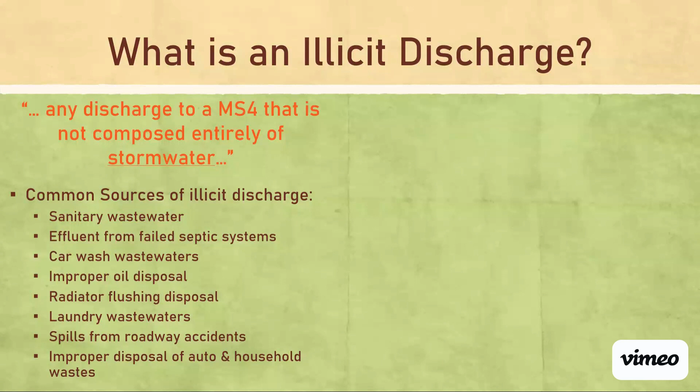And here's a list of other stuff that unfortunately sometimes gets into storm sewer systems, and that's what we want to prevent. So we got a list of sanitary wastewater, effluent from failed septic systems, car wash wastewater, improper oil disposal, radiator flushing disposal, laundry wastewaters, spills from roadway accidents, and improper disposal of auto and household waste. So those are the things we want to keep out. And here are some photos of some of those bad boys that, again, should not be in your storm sewer system.

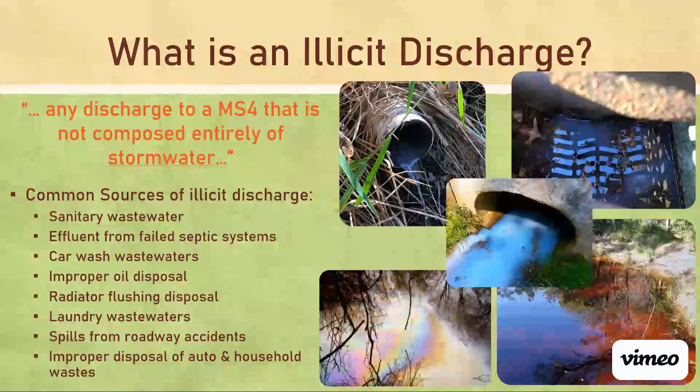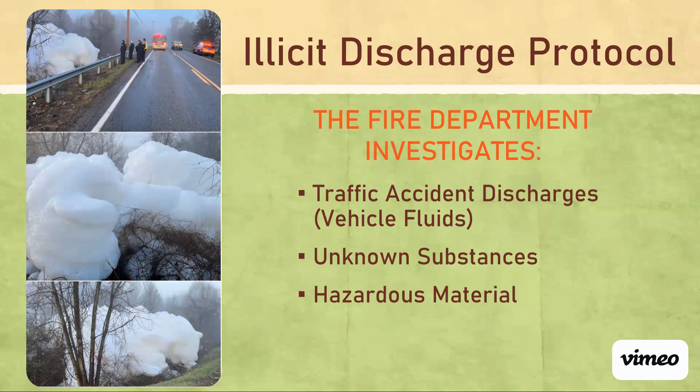So if you do get a call from a resident reporting an illicit discharge, who in the heck should you seek help from? Well, it depends on the type of discharge. It could be the fire department or the health department or us. So let's start with the fire department. If it is a traffic accident discharge, basically fuel or fluids from vehicles, an unknown substance or hazardous material, you're going to want to call the fire department. They're trained to handle those kinds of substances.

If it is fats, oils, grease, restaurants, dumpsters, or gray water, non-toilet water, septic sewage, solid waste, or open dumping, you want to contact your health department. If you're a community that has one of these health departments listed, you would call them. And if you don't have one, that means you call the county health department. So any of these things would be covered by the health department.

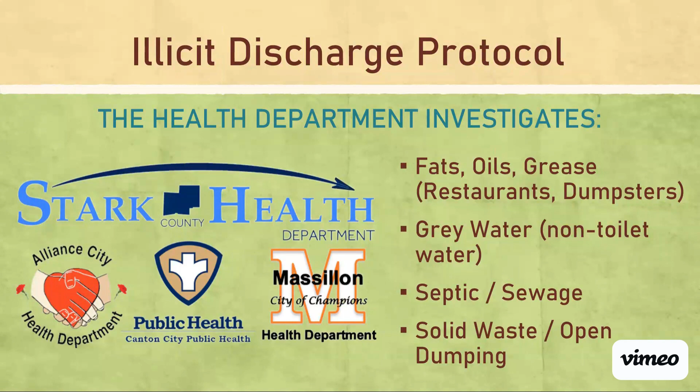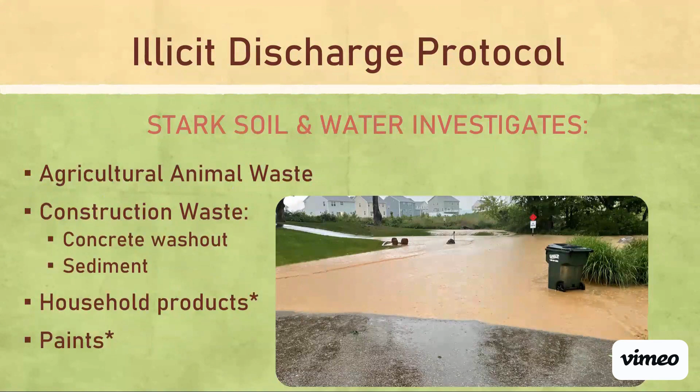And there are times when you would call us to do that initial investigation. So we handle agricultural animal waste, which is basically manure and wastewater, construction waste, concrete washout, sediment. Here's some examples of sediment that came off an idle site that got into the community storm sewer system. And all material that gets into your storm sewer system does eventually end up in waterways.

And there's a picture of it being dumped into a waterway, and that's what we want to prevent. Ohio EPA defines sediment into waterways as a pollutant. And then household products and paints, if you're with the city of Canton, they would handle that through their health department. We would conduct the initial investigation for those.

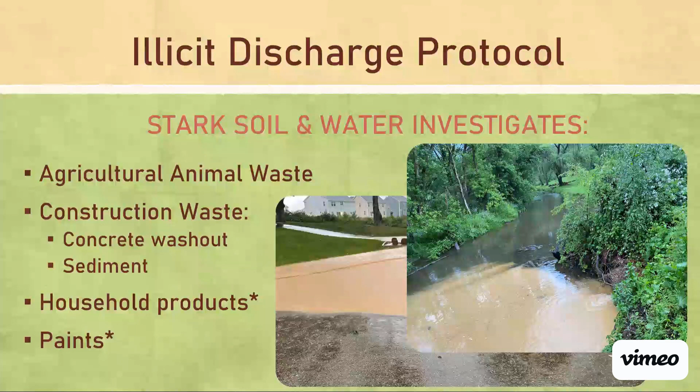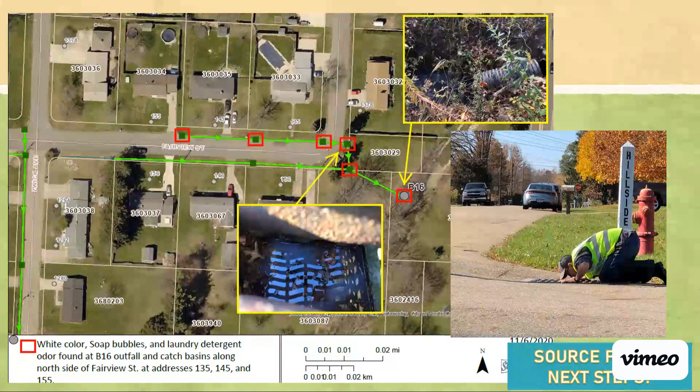So if you call us and say, hey, we may have an issue, can you check it out? What in the heck do we do for you? Well, we go out and do an investigation, and here is myself peering into a catch basin, trying to determine where some of that bad stuff is going. We'll create maps that indicate where we found the illicit discharge and also a possible source of where that illicit discharge is coming from. So we will turn that information over to you, and then after that, it's up to the community to follow through.

So you've got locate problem area, which most times we can do for you. Sometimes we can determine the suspected source of that illicit discharge. And after that point, you need to follow up with that resident. So you're going to need to knock on some doors and determine what may be causing that illicit discharge. So again, the important thing is once we give you the information, it doesn't stop. You need to take that next step to determine and have that source of illicit discharge removed and correct any illicit connections. So you're going to have to talk with some property owners.

And always you're going to want to document what you do because Ohio EPA audits all MS4 communities. In Stark County, they do 1 to 2 communities a year. There are 18 MS4 communities in the county, so you can do the math, but eventually they'll come around to you. So you want to have your ducks in a row and show that you responded to the illicit discharge and it got corrected.

There are a few cases where you need to notify EPA immediately, and there are 2 cases. One is if you discover illicit sanitary cross connections from industrial, commercial, or multi-family sources, not single family, basically duplexes or apartment complexes. The other is a leaking or broken sanitary sewer line that is actively contributing sewage to the MS4 community. In those two cases, Ohio EPA, under the permit, wants you to contact them immediately.

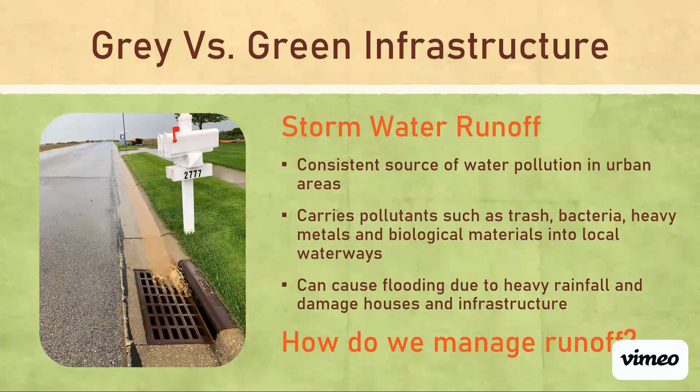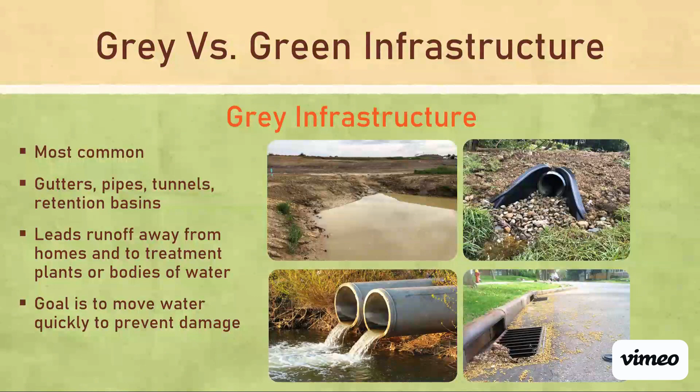Additionally, the capacity of gray infrastructure to manage large amounts of runoff is decreasing. And this kind of ties back into my first point that I made. As it's aging, a lot of these pipes are cracking, the water's leaking out. They're also getting clogged with sediment and trash. So over time, they're just not able to handle large amounts of runoff anymore.

Gray infrastructure can also be very costly to construct and maintain. As you know, a lot of these structures are really big. They're made out of heavy materials such as concrete or clay. They can also be deep in the ground, so it takes a lot of labor, a lot of money, and heavy equipment to not only install these things, but also to maintain and fix them.

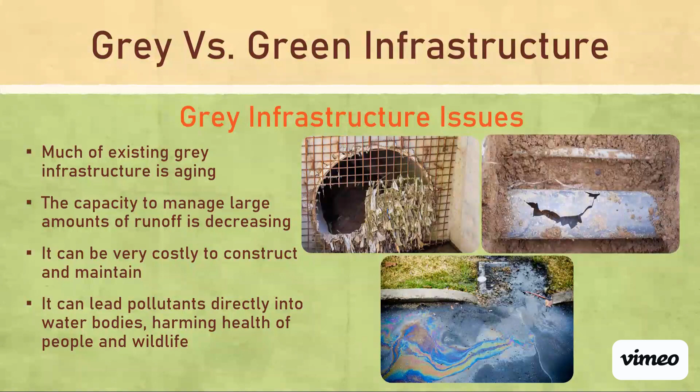And lastly, gray infrastructure can lead pollutants directly into water bodies. So if that water is not going to the water treatment plant, then oftentimes it's getting let out directly into the environment. And as we know, those pollutants are going to run off into things such as our ponds, our streams, and our lakes. And this can harm the health of not only ourselves, but also our local wildlife.

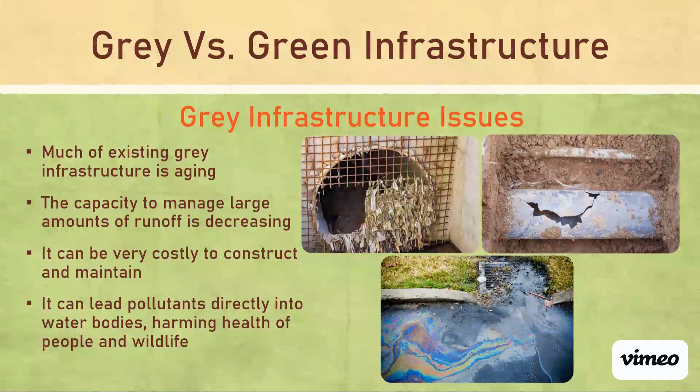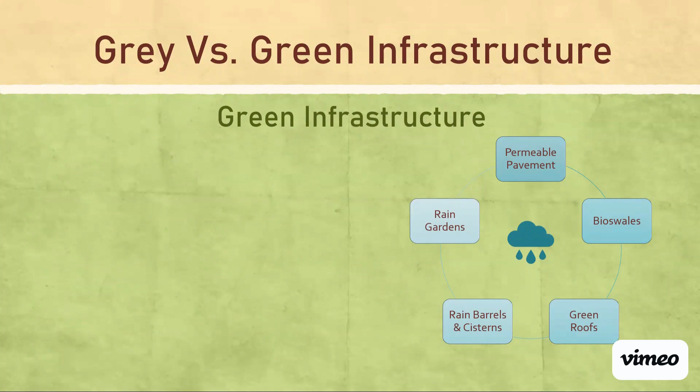So an alternative we see to gray infrastructure is green infrastructure. And that's going to be through things such as permeable pavement, bioswales, rain gardens, rain barrels and cisterns, and things such as green roofs as well. The goal of green infrastructure is to protect, restore, and/or mimic the natural water cycle.

Green infrastructure is going to do this by capturing rainwater where it falls through the use of pervious surfaces. And a pervious surface is going to be something that allows water to infiltrate through. It's going to have pores. And this is in contrast to an impervious surface, which is going to be things such as your driveway, your roof, or sidewalks.

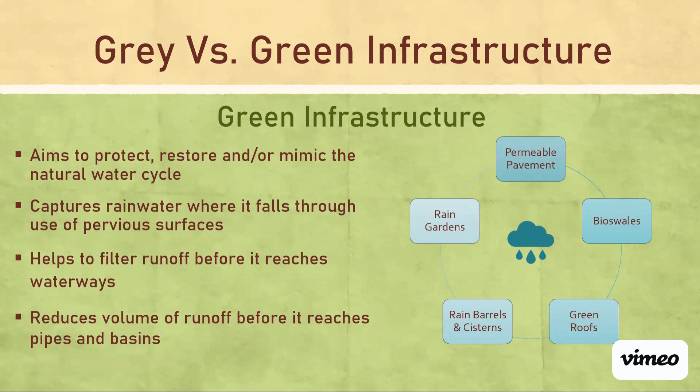Green infrastructure is also going to help protect our natural water cycle by helping to filter that runoff before it reaches our waterways. Green infrastructure can also help reduce the volume of runoff before it reaches our gray infrastructure, such as pipes and basins.

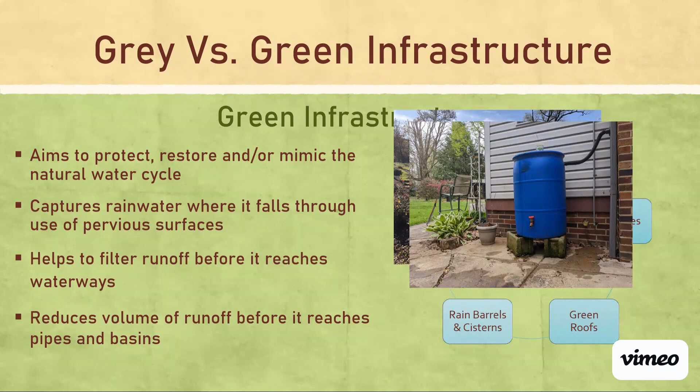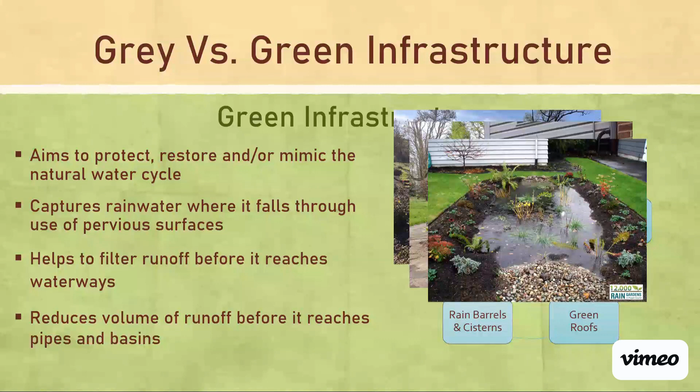This is a picture of a rain garden. So this is another good green infrastructure system for a homeowner. As you can see, that water is getting caught where it falls. It's also collecting water from the spout in the back there. And so that mulch and those plants are going to not only help capture that rainwater, but it's also going to filter it as well. Additionally, rain gardens, not only are they super pretty, but they also provide really good habitat for local pollinators.

This is an example of a green roof, and I feel like we don't see these quite as commonly around here, but it's just another interesting and a really aesthetic way of capturing that stormwater when it falls. And so those plants on top are going to capture that water right where it falls, and it's going to filter it as well.

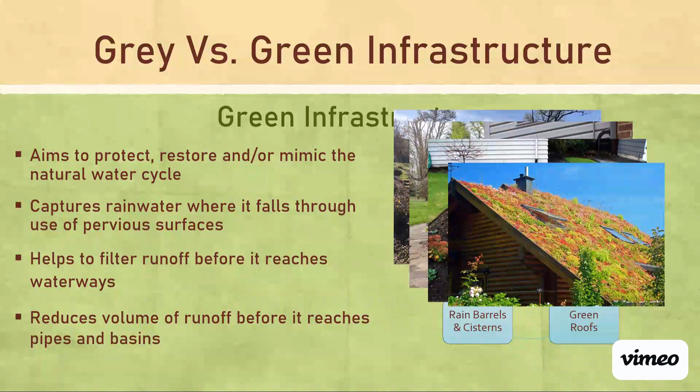And then this is an example of permeable pavement. There's a few different kinds of these, but with this one in particular, the water is going to filter between the pavement blocks, and then it's going to be stored in those reservoirs underneath. And then that water is gradually going to filter through the gravel substrate that's laid underneath those blocks.

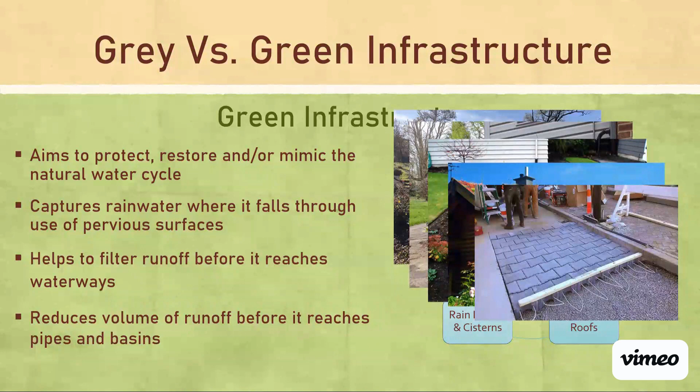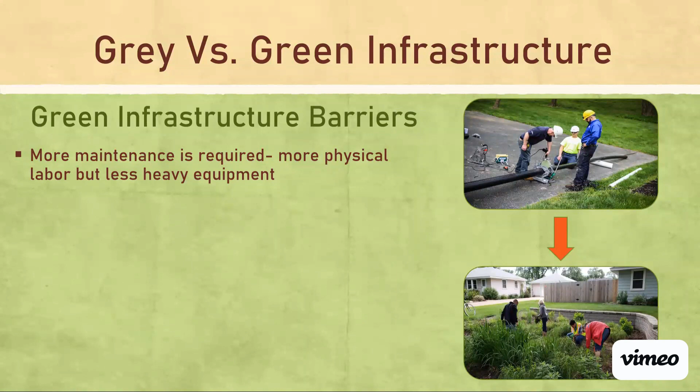So these all sound really cool and dandy, but there are some barriers we see to green infrastructure. The first one being that green infrastructure often requires more maintenance. It's typically going to look like more physical labor, but the use of less heavy equipment. And so things such as volunteering in rain gardens to remove weeds, removing sediment from pervious surfaces, we would see a lot more of that rather than bringing in these big pipes and heavy machinery to install that gray water infrastructure. Another issue we see is that installers can be hard to find for green infrastructure.

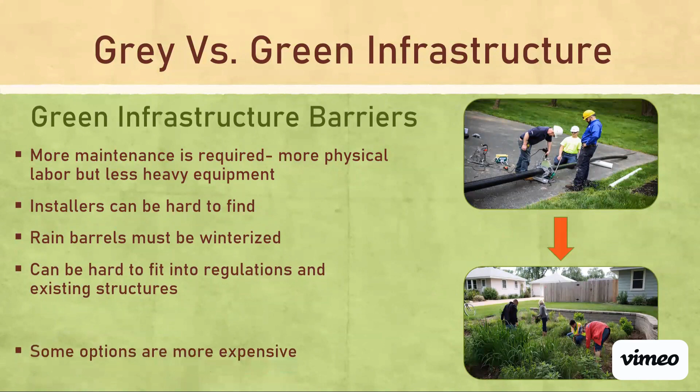Rain barrels have to be winterized, so this ties back into the maintenance aspect in that every year before the winter, there's just a few routine maintenance things you have to do with rain barrels. Green infrastructure can also be hard to fit into regulations and existing structures. And then lastly, with green infrastructure, some options are just more expensive.

So we see that there's pros and cons for both gray and green infrastructure, but what I want you to take away from this is that the best management strategy for our stormwater runoff is the use of both. So gray infrastructure is needed for our water treatment, and it's typically better at handling large volumes of runoff. But green infrastructure can help protect our gray infrastructure systems by helping to reduce reliance on water treatment plants. And it's also going to help reduce our volume of water that's reaching those pipes and gutters.

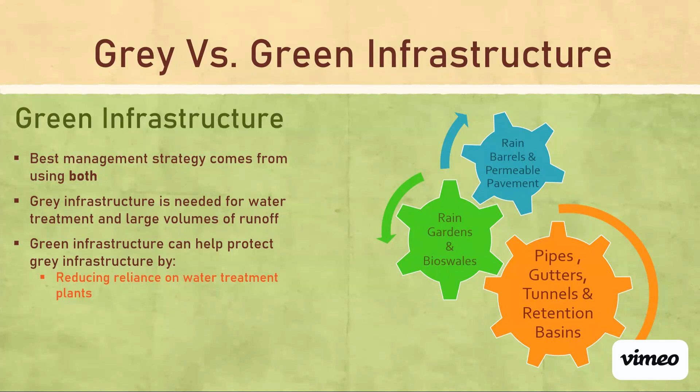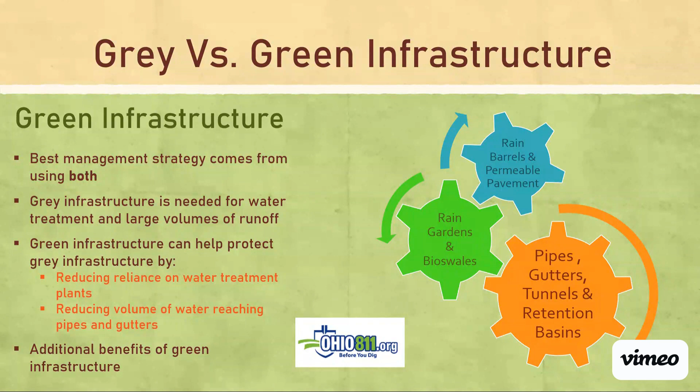There's also some additional benefits of green infrastructure, such as preventing soil erosion, increasing the aesthetic value of properties and landscapes, and also providing habitat for local wildlife and our pollinators. And just an additional note before wrapping this up: if you go home and seriously consider building a rain garden or a bioswale, anytime you're digging further than 6 inches, you want to call 811. This is going to help you avoid digging into any gas or utility lines.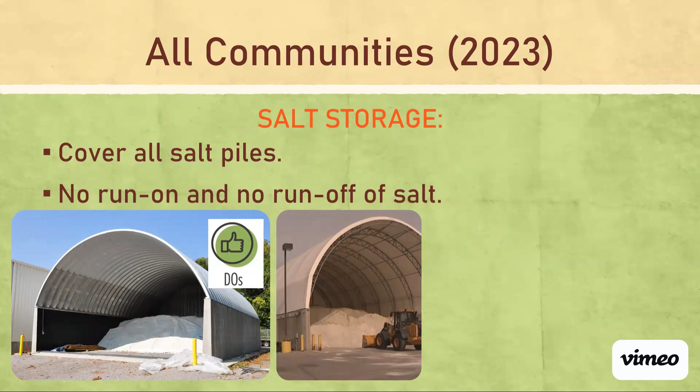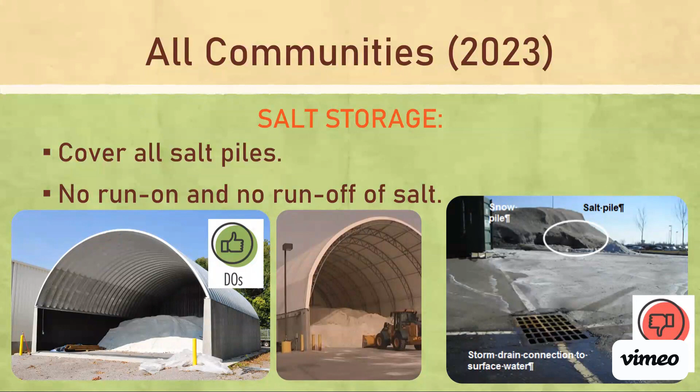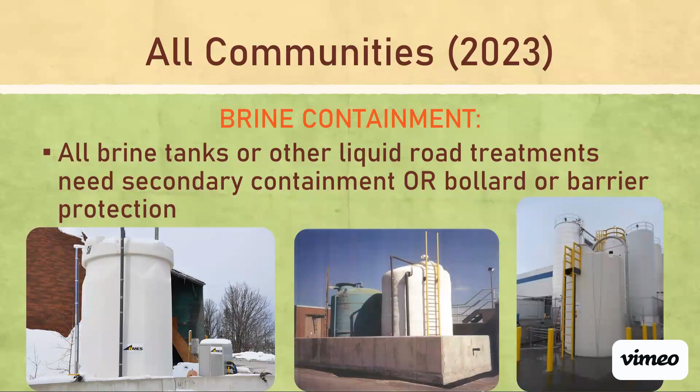Cover all salt piles, and there should be no run-on and no runoff of salt. So you've got 2 pictures of covered salt, and this is what you want to avoid: salt that is exposed to the elements and salt that can run off into your storm sewer system. So by the end of this year, you need to make sure that run-on and runoff is not happening at your road department garages. So implement by 2023. And then all brine tanks and other liquid road treatments need secondary containment or bollard or barrier protection. That needs to be done by 2023.

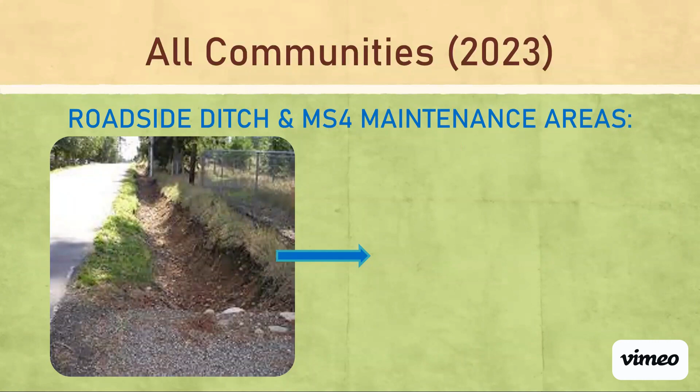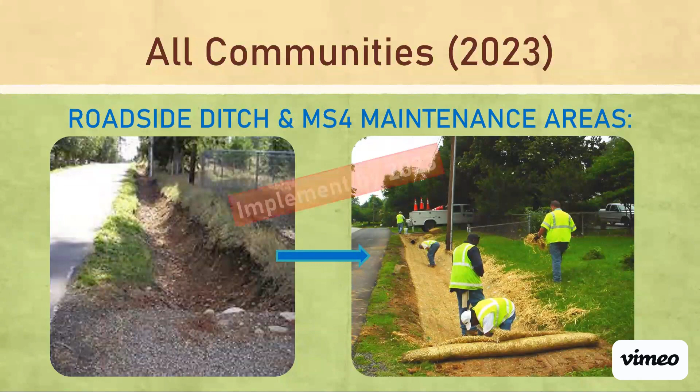And then finally, for this year, with your roadside ditch maintenance program, ditches need to be stabilized within a certain period of time. So in terms of maintaining your roadside ditches, you need to make sure that you stabilize it once you are complete with the work. There are specific regulations in the permit of how quickly you need to stabilize that ditch. And that, again, needs to be done by 2023. So let's look at them a little more closely.

For areas of soil disturbance associated with ditch or MS4 maintenance caused by the small MS4, soil stabilization shall at a minimum be initiated in accordance with the timeframes in the following chart. So if it's within 50 feet of surface waters of the state, you basically have 7 days of final grade, or within 7 days if a disturbed area will remain inactive for over 14 days. Oh, I'm sorry, I got those mixed up. Try again, John. So not within 50 feet, you have 7 days. Within 50 feet, you have 2 days of reaching final grade, or within 2 days if the area is to remain inactive for over 14 days. So not within 50 feet, 7; within 50 feet, 2.

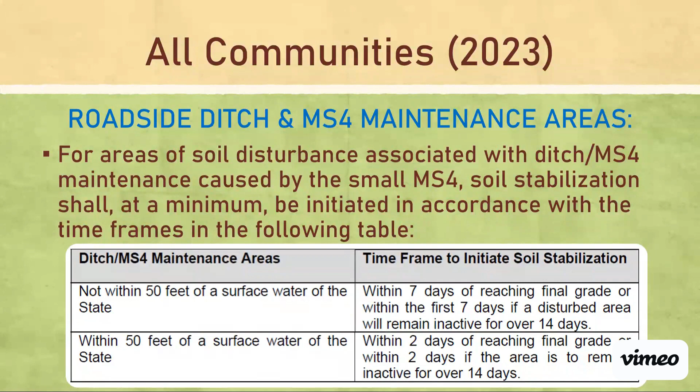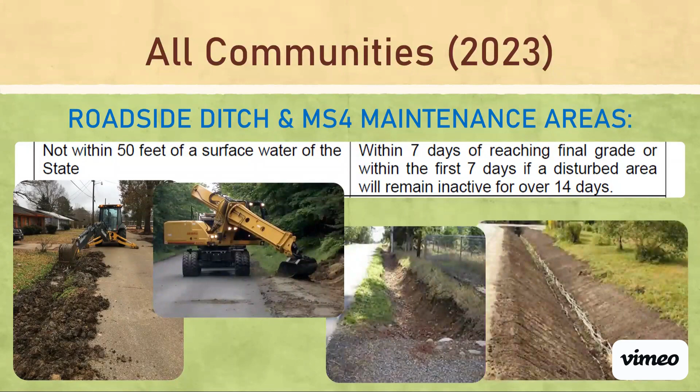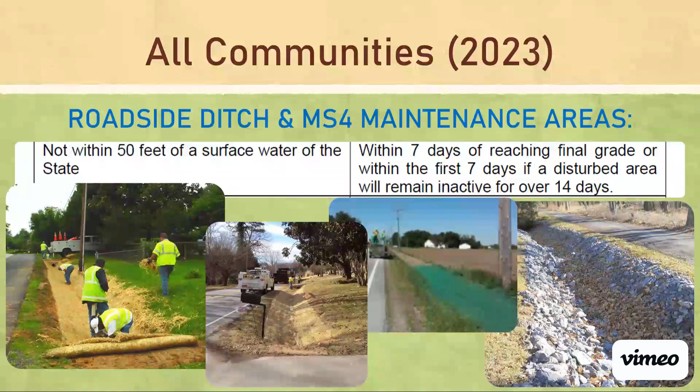And here are some pictures to show ditch work being done, and then getting it stabilized. And the last picture is a rock-lined stabilization, which is permitted. So the important thing is that you just don't dig your ditch and walk away. You do need to stabilize the soil. So in this example, you see on the left where they started doing some ditch maintenance. They put down erosion control matting, and they have seed germination. You can see it in the yellow, a little hard to see, but you can see seed there. So that's what we're looking for.

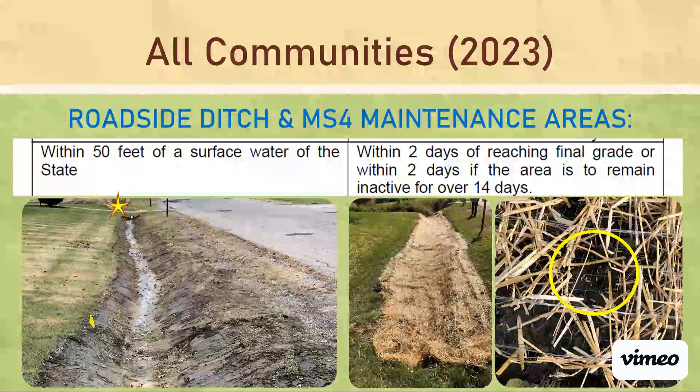So those are the 3 things you need to make sure you have in place by the end of this year, and it applies to all communities. So again, covering salt piles, secondary containment for brine or other treatments, and having guidelines in terms of soil stabilization when you undertake ditch maintenance. So let's move on to what you need to do in 2023 and by 2026 for TMDL communities.

So what is TMDL? Well, we live in a developed society, and pollutants are getting into our waterways. And under the Clean Water Act, there's a regulatory term that's called a total maximum daily load, or TMDL. It describes a plan for restoring impaired waters that identifies a maximum amount of a pollutant that a body of water can receive while still meeting water quality standards.

MS4 communities contribute pollutants to waterways, but your permit and stormwater management plan implements programs to address TMDLs in your community. Your actions help reduce pollutants that end up in our waterways, and that's a big takeaway. So let's look at Stark County and see what we got.

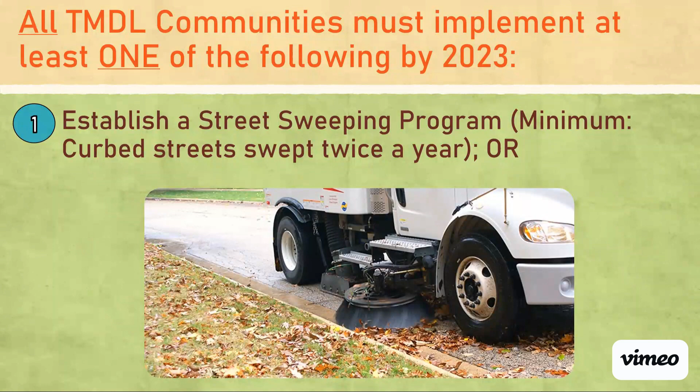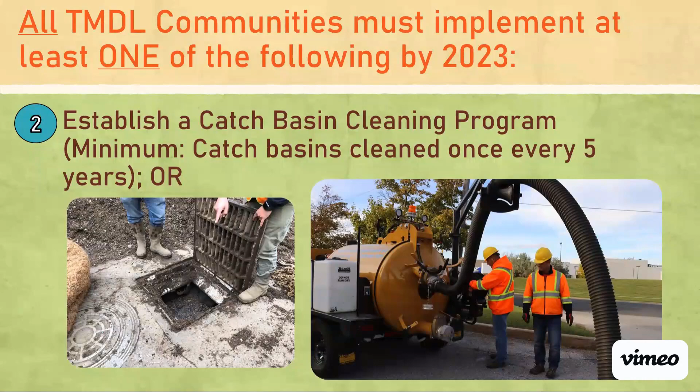So what do you have to do? All TMDL communities must implement at least one of the 4 following practices by the end of this year. Establish a street sweeping program, minimum curb street swept twice a year, or establish a catch basin cleaning program. Minimum standard is catch basins cleaned once every 5 years, or establish a leaf and yard waste collection program, or inspect

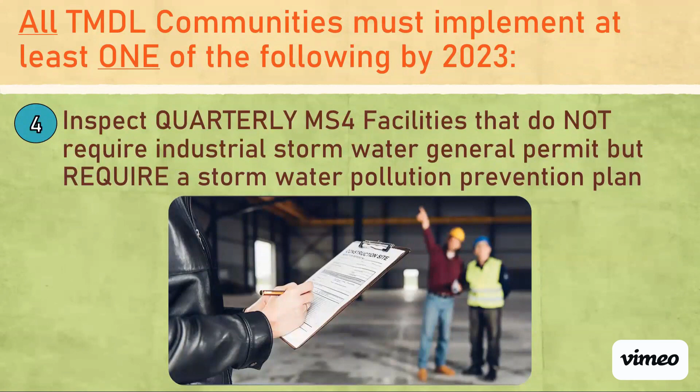quarterly MS4 facilities that do not require an industrial stormwater general permit, but require a stormwater pollution prevention plan. So again, you don't need an industrial stormwater general permit, but you do need a SWPPP, or a stormwater pollution prevention plan, for your facility. So what kind of MS4 facilities need a SWPPP?

They are listed in the permit as vehicle maintenance facilities, garages, fire stations, because you're going to wash your fire trucks and ambulances, wash bays, etc., bus terminals, composting facilities, impound lots, waste transfer stations, yard waste, municipal waste, etc. Those are considered facilities that need a SWPPP. If you're unsure, give us a call.

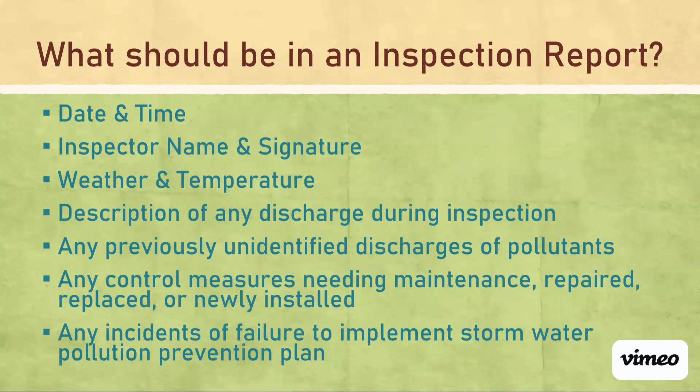What should be in that quarterly inspection report? Well, you need date and time, inspector name and signature, weather and temperature, description of any discharge during inspection, any previously unidentified discharges of pollutants, any control measures needing maintenance, repair, replacement, or new installation, and any incidences of failure to implement the stormwater pollution prevention plan. That's what would need to be in a report if you're going to do that practice.

Now, if you are with Hartville, Lake, Massillon, Navarre, Perry, or Stark County, you have an additional requirement, because you have total phosphorus in the waterways in your community. And here's a list. For example, Hartville has the Cuyahoga River, Lake Township, Cuyahoga, Massillon, Navarre, Perry have the Tuscarawas River, and Stark County has both Cuyahoga and Tuscarawas River. And they've identified total phosphorus as a TMDL with those waterways.

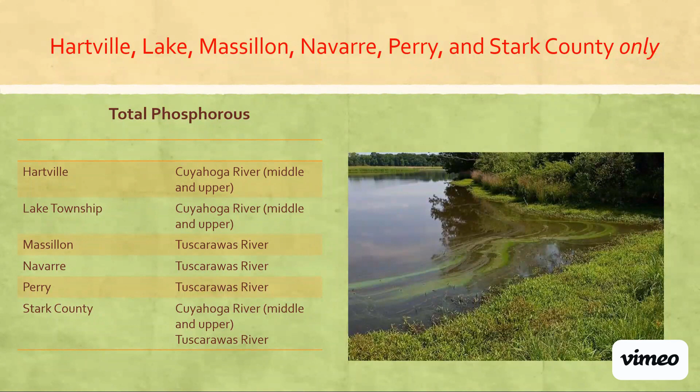So what do you need to do? Well, you have to do one of the following in the next 5 years. So you have 5 years to do one of the following. Retrofit one stormwater practice for an extended detention basin. And this will be a basin that the community owns, that you're responsible for.

Or restore at least 300 linear feet of channelized stream, or update an ordinance or other regulatory mechanism to require Table 4B practices or any other green infrastructure practices where feasible, or install one Table 4B practice to treat a minimum of 1 acre of existing impervious area developed prior to 2003. So let's look at those last two, because it keeps referencing Table 4B.

What is Table 4B? Well, you see below are practices in Table 4B in the permit: bioretention, infiltration basin, infiltration trench, permeable pavement infiltration, and underground storage facility infiltration. Basically, infiltration practices. So the thought is, as opposed to sending the water into your storm sewer system, you're going to infiltrate it on that site into the soil like it used to before it got developed.

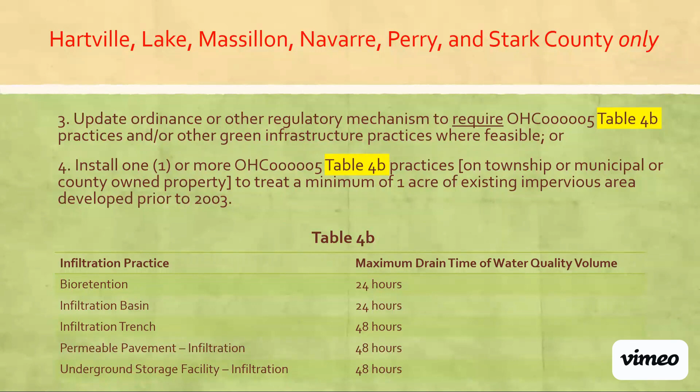So that covers where you need to be in 2023 and by 2026. So that's the end of our presentation today.